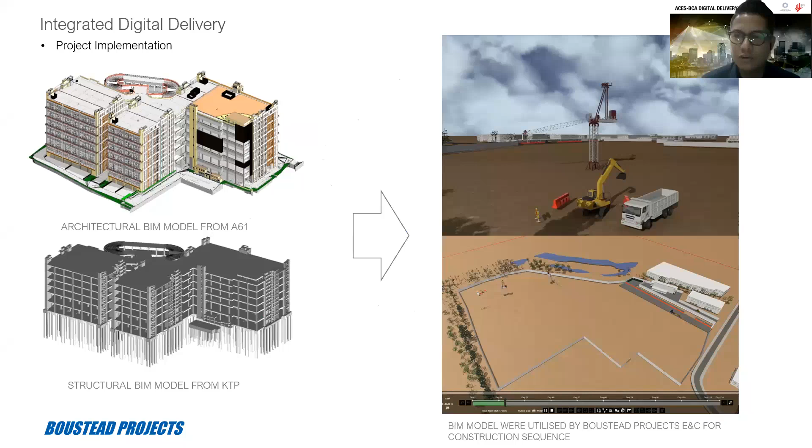As I mentioned, right from the start we inherit our model from the consultants, and we use this to visualize our construction sequence. We enhance the digital model further to allow us to use it for activities like site utilization, adding more details so the level of detail and level of information is enhanced. As you can see in this image, this is actually extracted from the construction model which we inherited from the consultant earlier.

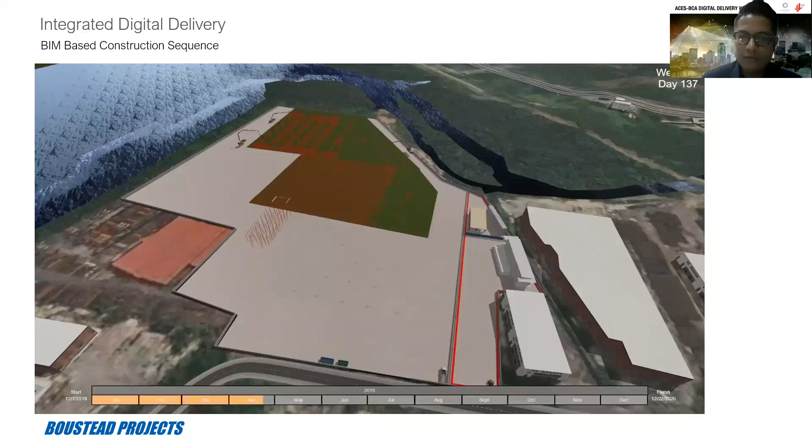I'll play a short video of our construction sequence. This is an example of how we utilize a digital model, or building information model, to create a construction sequence and better visualizing tools. You can see it's integrated with a schedule, and you can see the timeline below, the start date and the end or finish date, all integrated together with the building information model. Let me just speed up a bit.

So compared to the conventional way of showing construction timeline and schedule, this is a very powerful way of visualization. Not only that, we have a very clear understanding of how the items are being installed based on the timeline also.

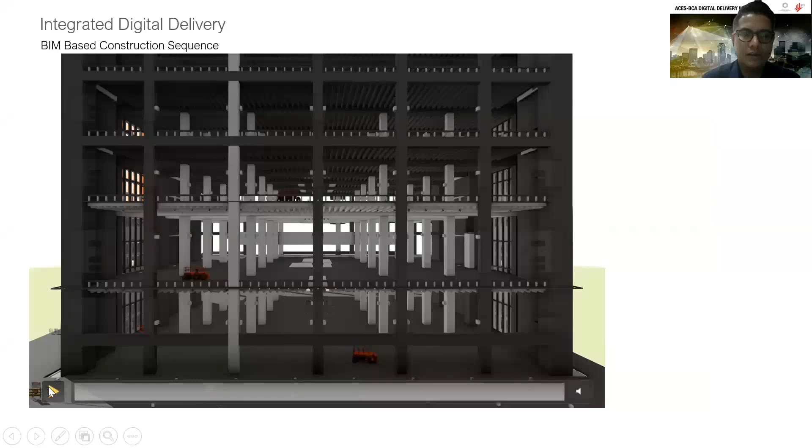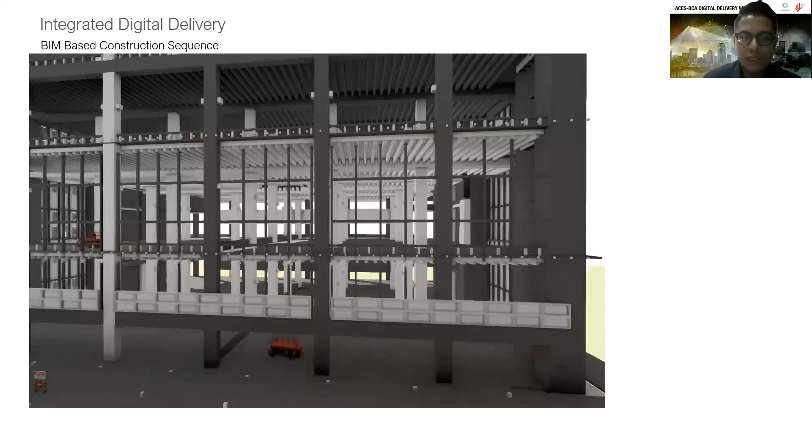Moving on, not only for the whole project timeline, we can also go into detail to show the installation sequence of a particular area. In this case, we show a video of how the sequence of the facade is going to be installed at a particular area, so you can go into detail with this BIM-based construction sequence. I think it's a bit laggy, let me move forward.

We do quantity takeoff from the BIM model. What it means is that information is extracted from the BIM model, and we can do certain activities for quantity takeoff for this project.

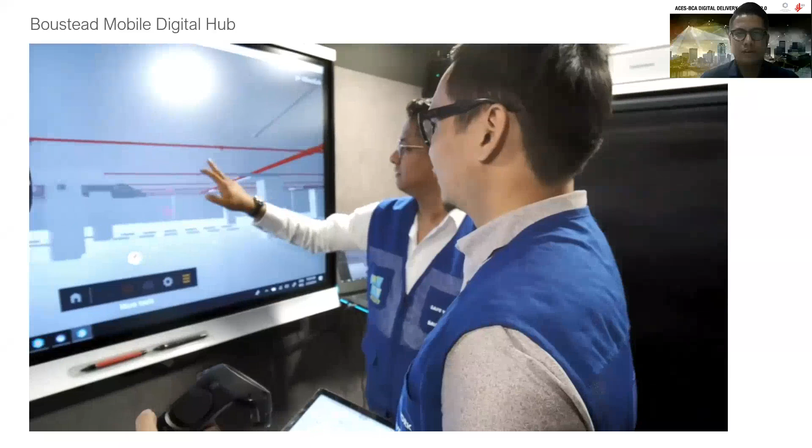I'd like to showcase to you guys also what we have here. This is Boustead's mobile digital hub - a 40-footer container retrofitted with the latest technology, such as high-end laptops that can facilitate VR activities. We also have VR goggles for visualization, and an interactive smart board or interactive screen for us to share and collaborate with different stakeholders, not only within the organization but also externally with our other stakeholders.

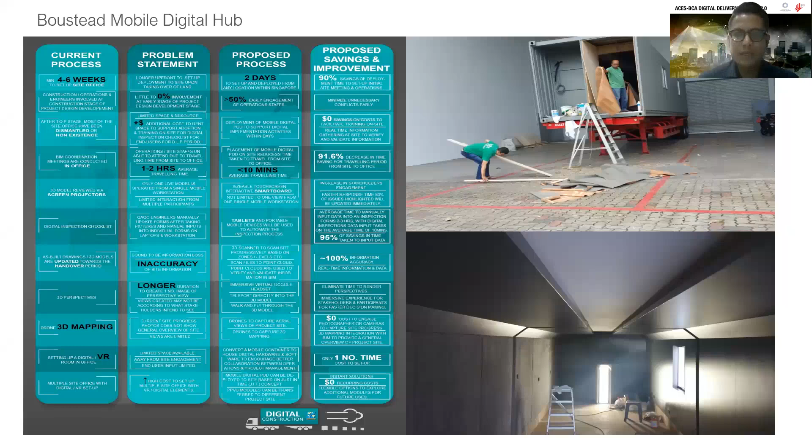So let me touch a little bit on why we do this. This is a mobile digital hub - it sits on a trailer bed, so it can be moved around Singapore. The idea here is mobility, so whenever it can be deployed, it's basically plug and play. It can deploy at any point in time, to any other site or area.

So for Kranji Green MSRF, we have this period called the intensive collaboration period, ICP. The objective of this period - I believe most of us who have experience getting models from the consultant or building information models know there's a lot of question marks about whether this model is according to the design intent and what is being designed for. So to allay all these fears or questions, we have this collaboration period that allows us to answer some of that.

First, the objective - we want to share visualization of different trades and disciplines, validation of the design intent, identify design and coordination issues early, and of course ensure involvement of all stakeholders. In this case, we have the architects, we even have the owners in JTC themselves participating to make sure the models we inherit from the consultant are according to what is being designed for.

So it takes place in a mobile digital hub. It becomes a collaborative space for us, where during the beginning of the project, while the site office has yet to be set up, we have a space for us to actually collaborate in this environment.

And of course, those who have been doing building information modeling have implemented meetings such as BIM coordination meetings, but separately you also have your design meeting, you also have your technical meeting. On this project, what we did was integrate building information model or digital model into the ICE session, and the technical meetings were streamlined, so we don't have a separate BIM coordination meeting and technical meeting.

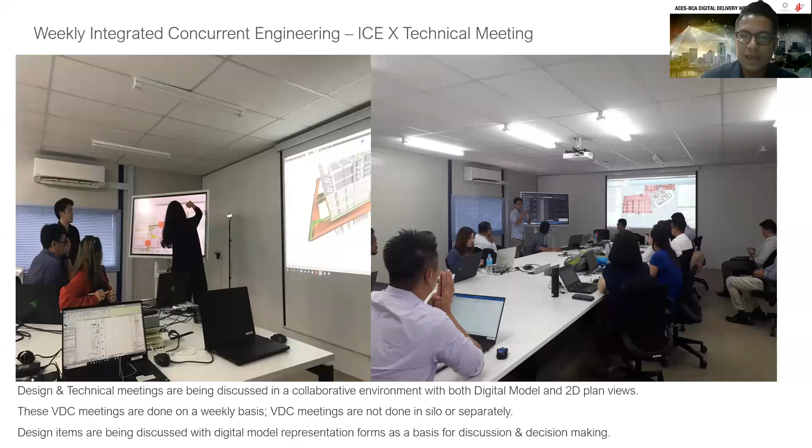Instead, we have one meeting, and we use BIM or digital model as a form of visualization, a form of communication throughout the project stakeholders, which includes the consultants, our engineers, our architects, and also the contractors and subcontractors downstream who are responsible for each trade, to participate and resolve any coordination, design, or technical issue during the meeting itself, with the digital model as the base of all this discussion. So it's not done in a silo or separately, and it allows us to streamline and at the same time become more productive.

And of course, with that session, we collect before and after pictures to show where issues are arising, and then we collect this data. I think at this time and era, data is like they say, the new oil - data is king. So we want to use data rather than emotion for results. Data shows the correct result. So during that session, we also collect the data, identify the items, the number of items that need to be resolved, and give the stipulated timeline and date.

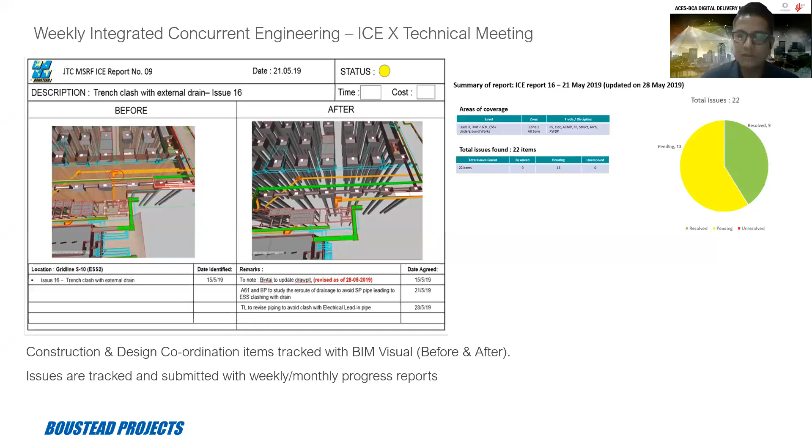And we have a common data environment. Of course, as I mentioned, every file is being hosted on cloud in this project. So we have a common data environment provided by the client in this case, where most of our forms and most of our files are integrated on this common data environment.

Another interesting session - as you know, conventionally what we do when we want to get approval from the consultant, or in this case the architect, in terms of design, is we have to submit a set of drawings for approval. But now to expedite this process, we engage the architect early in the project and get them to use immersive technology such as VR, virtual reality.

In these slides, maybe I'll display - so what we did was engage him and show these are the exact design and materials that will be seen within the digital model and in the actual installation and fabrication of this prefabricated bathroom unit. So almost immediately we can get approval from this session, and then of course we still continue to produce the shop drawings. But having said that, we know that in principle we have the approval, we can start the fabrication of all these elements and installation items.

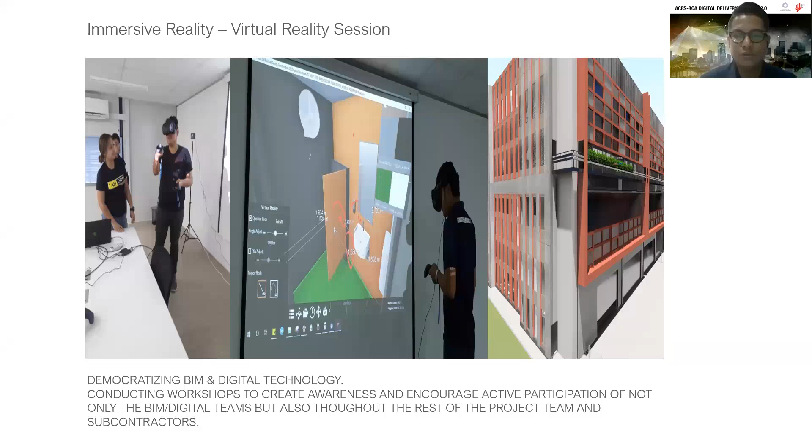This gives them an idea of what they'll see on site later, and at the same time allows them to embrace technology and engage at another level, knowing there are platforms for them to use throughout the project implementation.

We also conduct workshops, empowering them to navigate and review the BIM. The ethos we want to share with project stakeholders is that this digital model does not just belong to the BIM team or the digital guys who create it, but belongs to the whole project team, and all stakeholders have a responsibility.

We need to give this knowledge and empower them to navigate and review the BIM model. By doing so, we allow them full confidence that the accuracy and integrity of the BIM model is there for them to use in their work.

The point I want to put across here is mobility. During this period of the COVID-19 pandemic, if we still relied on hard copy paper drawings, we may face a lot of disruption in the workflow. Now with smartphones and QR codes, we can access all this information easily at the press of a button.

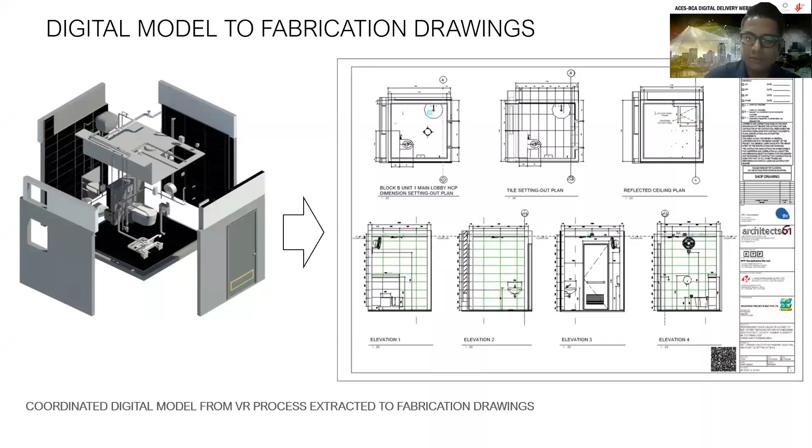Visualization: these are some images showing how we use the digital or building information model to show the exact material and get approval for design.

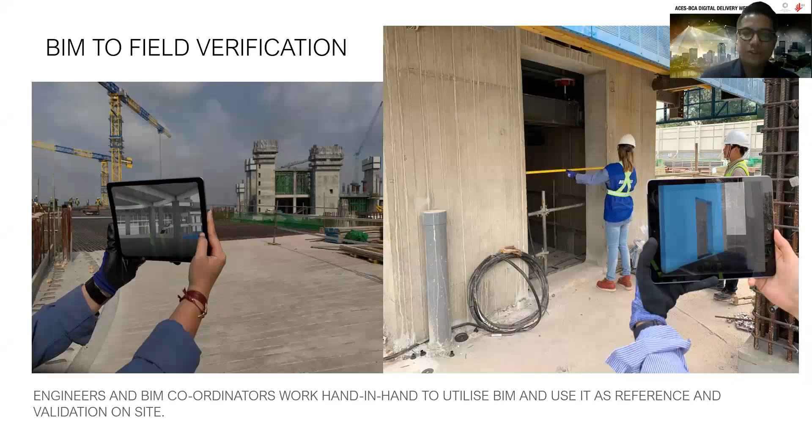We also have what we call BIM-to-field verification using tablets and iPads on site, where the BIM coordinators, engineers, and site coordinators work hand in hand, making sure all installations and measurements match what is coordinated and designed in the building information model. They use it as a reference and validate it on site.

We also use drones—Boustead Eye in the Sky, as we call it. Most people think of drones just for collecting images or aerial views, but we want to go a step further, not only collecting point clouds and data.

We are also in the pipeline to integrate drone inspection with BCA CONQUAS using artificial intelligence, identifying non-compliance according to BCA CONQUAS during inspection. This means hard-to-reach areas or areas with a lot of safety risk can be inspected using the drone—we're relying on technology to do inspection moving ahead.

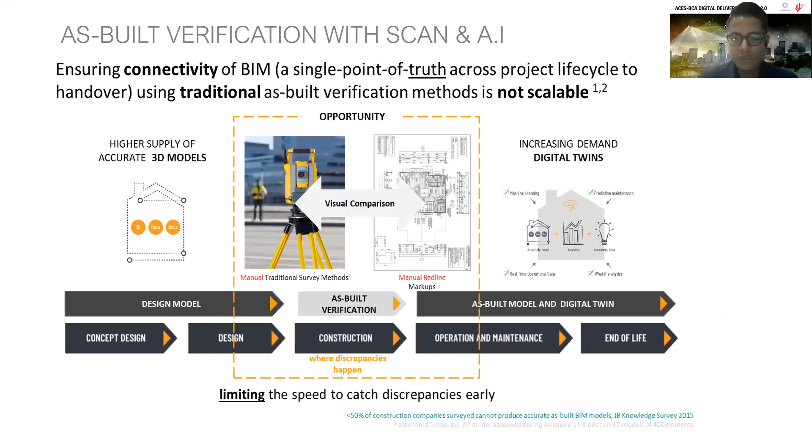The pain point is that most of the time, manually looking for discrepancy and inaccuracy requires visually running through the model with the point cloud files. But now, with the AI platform we have on board, we can automate that whole process.

First, we collect point cloud files using drone scans and 3D LiDAR scans. Second, we combine these files—the digital model or building information model and the 3D design model—with the point cloud files onto a platform using AI to verify, and almost immediately all these issues can be identified automatically.

This means you have an in-between process where you progressively update the model according to what is actually being built on site.

Here's an image of point cloud files collected during construction. In layman's terms, previously this would be done conventionally by overlaying 2D plans with images, but now it's done using point cloud files.

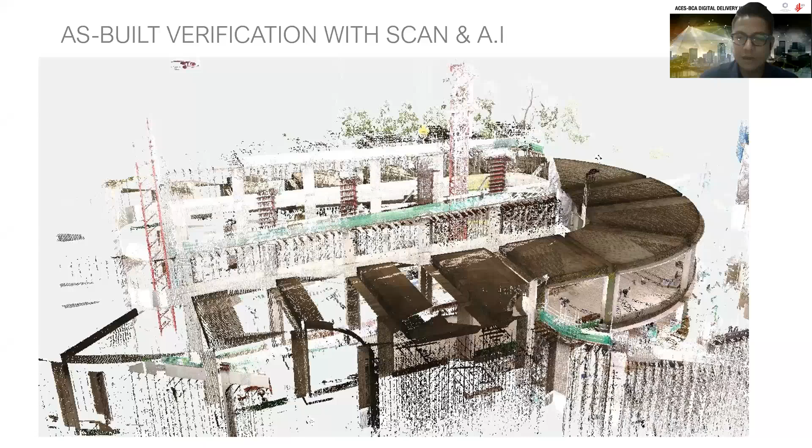So if there's any discrepancy between what is built and the digital model, you shift the building information model or digital model accordingly to what is collected using the 3D scan and the drone capture.

A quick video again showing how the guys are using the scanning on site—let me just speed this up a bit.

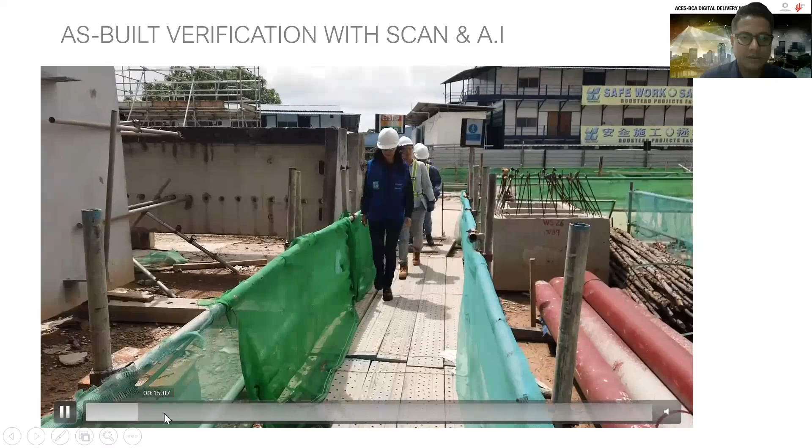So if you can see, these guys are actually the BIM managers, the BIM leads, and the BIM coordinators, moving ahead as part of upskilling our guys. The BIM guys are not just making sure the BIM models are modeled accurately, they're also involved in validating this model on site. They're empowered to use new equipment such as laser scanning, and it's not rocket science to use some of these technologies. It helps them understand better how the site works, and at the same time integrate with the BIM model. So these are the guys involved in this project.

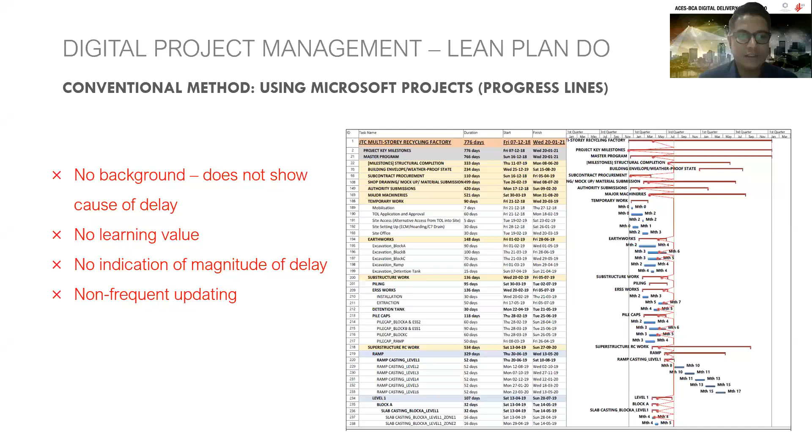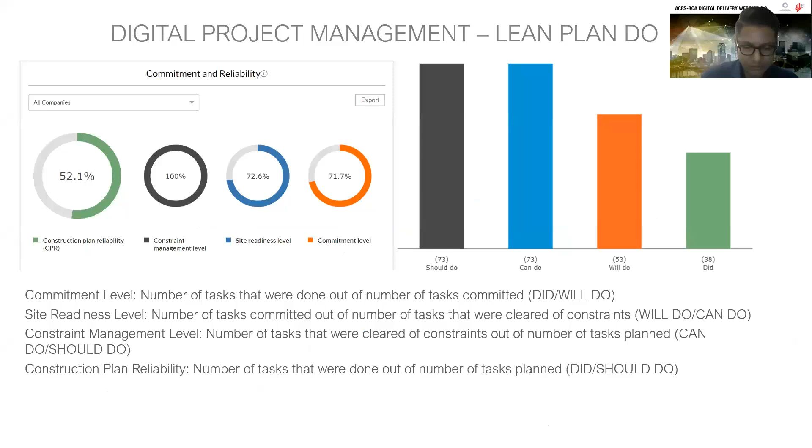As I mentioned, we use Lean methodology, specifically Lean Plan Do. It's a platform - again, I'm not here to sell software, but this is a digital solution that allows us to understand the project better in terms of transparency and where the bottlenecks are. Conventionally, a plain Gantt chart doesn't show any cause of delay, so there's no learning value. But with Lean Plan Do, we can see where the delays are, the actual implementation versus the plan implementation, what we can do, what we should do, and why we did not do it.

Talking about project transparency, we can identify and engage the bottleneck - not to blame, but to understand the reason for delay. With that, we can manage or anticipate them and progress towards completing the project. So a digital platform like this allows us to have a very transparent project overview, and this is how the interface looks like.

It is quite friendly and user-friendly in terms of the interface, easy to use. Of course, we initially had a lot of challenges in implementation, but having a workshop like this helps minimize the gaps and makes people understand why we implement things as such. Because the important thing about managing or implementing this solution is you need a collaborative spirit first - you need to make sure the key stakeholders are involved, and data is input correctly so you can collect it properly.

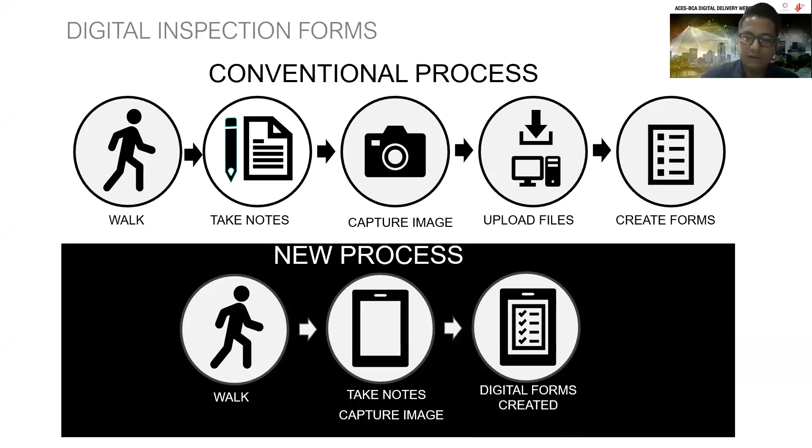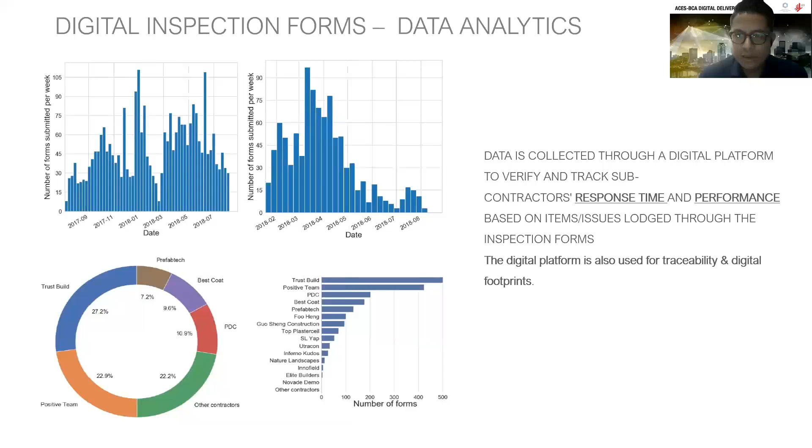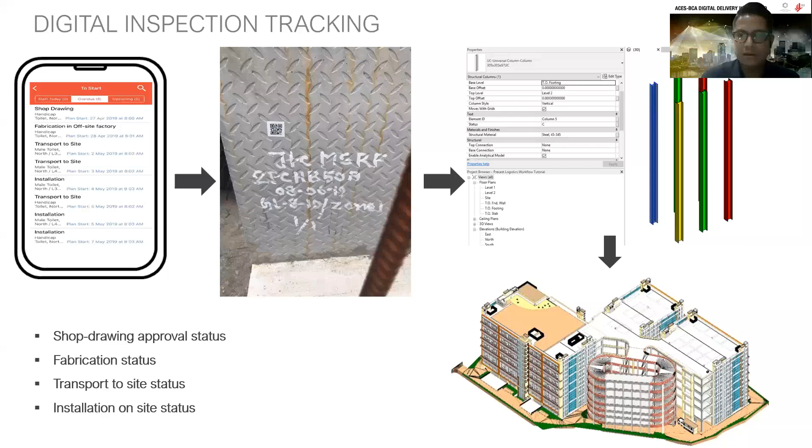We have digital inspection tracking. What this means is we want to track 4 statuses: the shop drawing approval status of our fabrication or precast element, fabrication status, transport to site status, and installation on site status. So these 4 steps, we integrate all into our digital model.

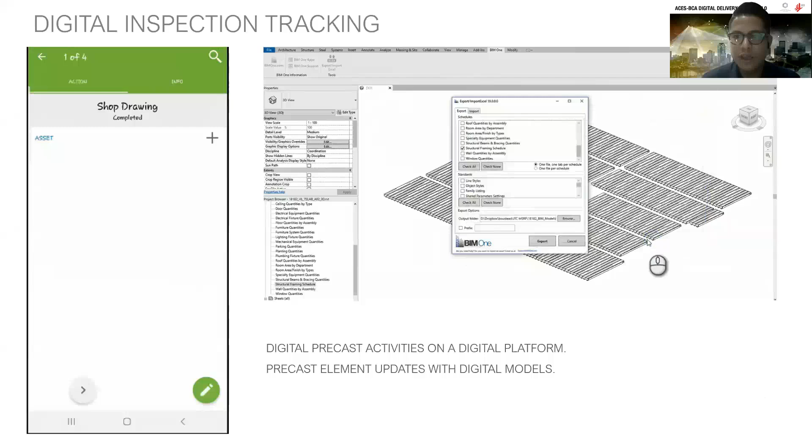I'll show you a quick video of how we do this. QR code is the base of this technology - we push this data into a platform, and then this data can be pushed back into the building information model to show the status of each precast element, whether it's been installed, yet to be approved, yet to be on site, or already on site. You can see the color changes in this video. Let me just fast forward a bit.

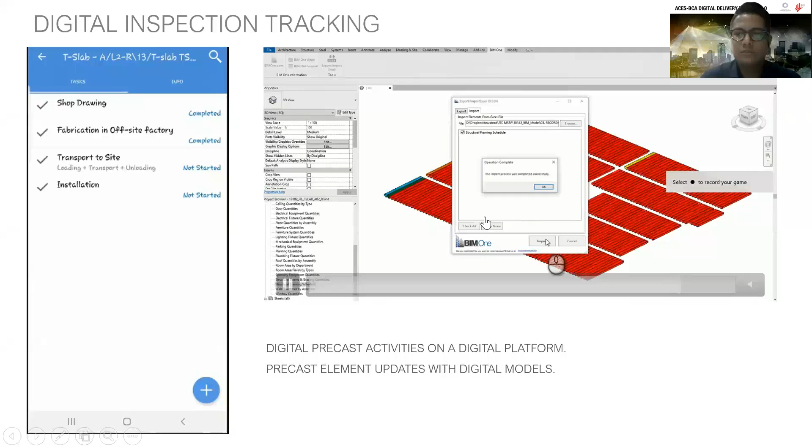Yeah, so as you can see, once we push the data, all the statuses of the precast elements can be shown in different colors based on the status.

So what's next for us? I mentioned our digital transformation journey has 3 holy trinity, if I may say: the people, the process, and the technology. In fact, as part of the process or the technology, data forms the base of all this implementation. And without building information model, we cannot execute what you have just seen earlier. And with all this data, what we are trying to do is integrate them and ensure there's a seamless integration between all platforms and solutions.

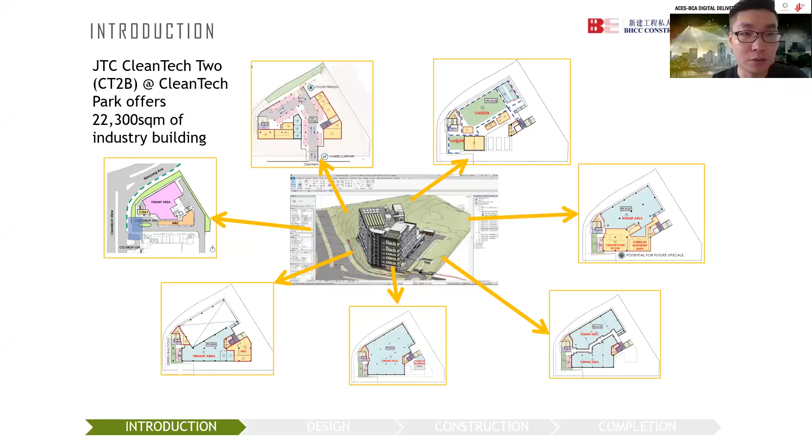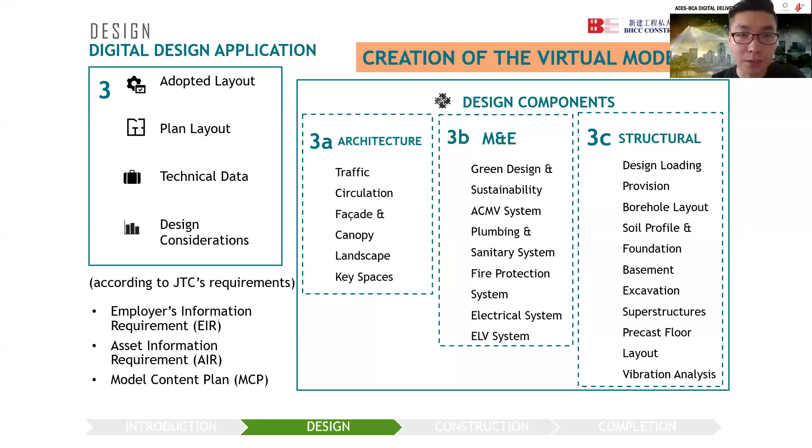Okay, for the design, this project has adopted a 4-stage digitalized approach through IDD towards design, construction, fabrication, and as-built. At the design stage, we apply digital platform for all ARCHI, MEP, and C&S. We also use real-time model coordination software with a cloud-based server, so everyone can access the cloud and study the models.

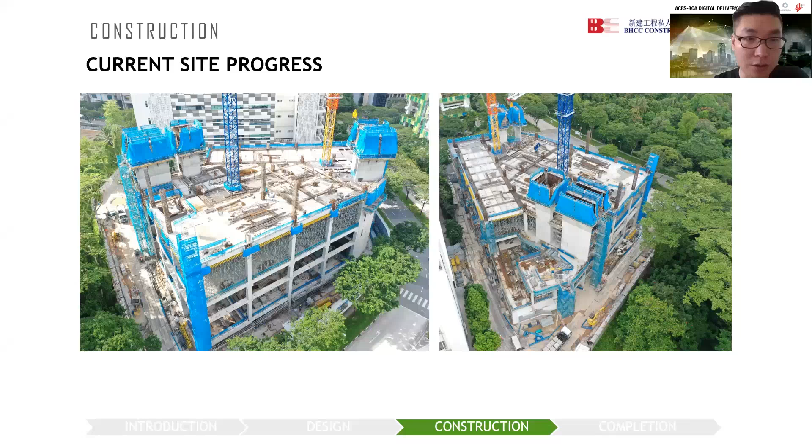Okay, for construction, this is our current site progress. You can see here so far we've finished the 4th story already, so we are going to do the roof.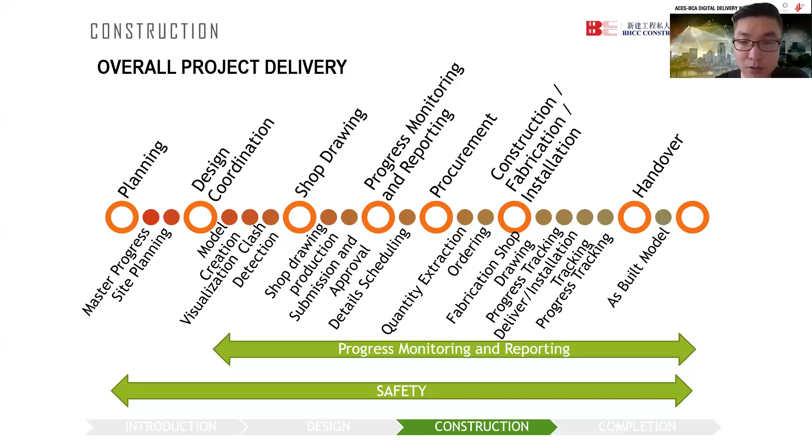The controls - based on the actual work and the spec requirements, we generated this overall project delivery roadmap. For this project, it starts from planning, design coordination, and shop drawing, progress monitoring, procurement, construction, and then ends with handover and as-built model submission. All the details you can look through here, and it's quite easy. Because of time limits, I won't explain one by one.

Okay, before I go through the IDD details, let me quickly go through the construction work challenges for this project. The first one is site access constraint. The following is tight work spacing, as this project is very close to the CT2A building. And then the next is wildlife movement around the CleanTech park - you can see a lot of wildlife around the site.

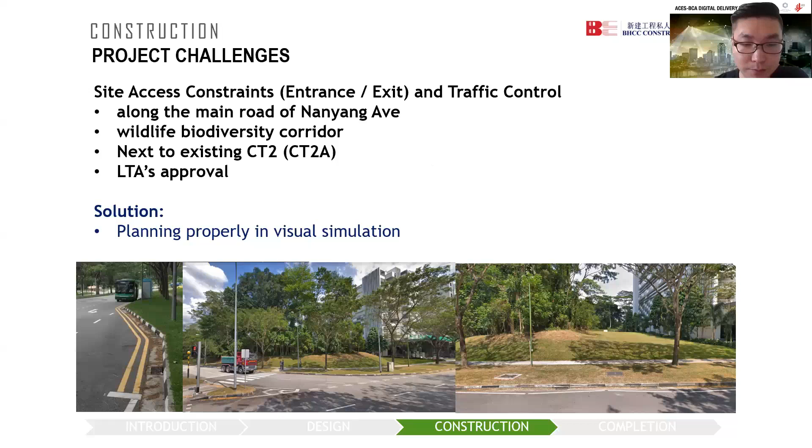So our IDD implementation was based on the project requirements and challenges. Because of the site access constraint, traffic control is very difficult. So the first challenge is overall site deliveries. So good planning is very important and necessary for our project.

Referring to the drawings and also collecting the design models, we finished our construction model and then master program. With further development, we issued to site our site utilization plan, sequence simulation, and safety education for the site project team for discussion, to try to limit the discrepancy for the works.

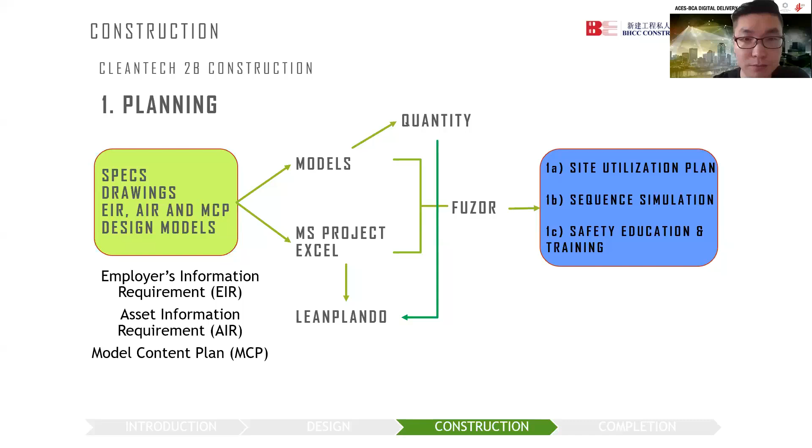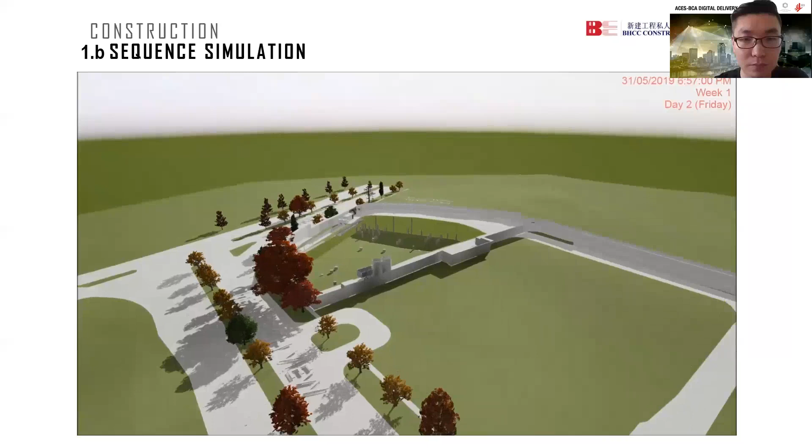This construction sequence is based on the planning schedule and then the actual work schedule. So far, the planning work is based on the actual date.

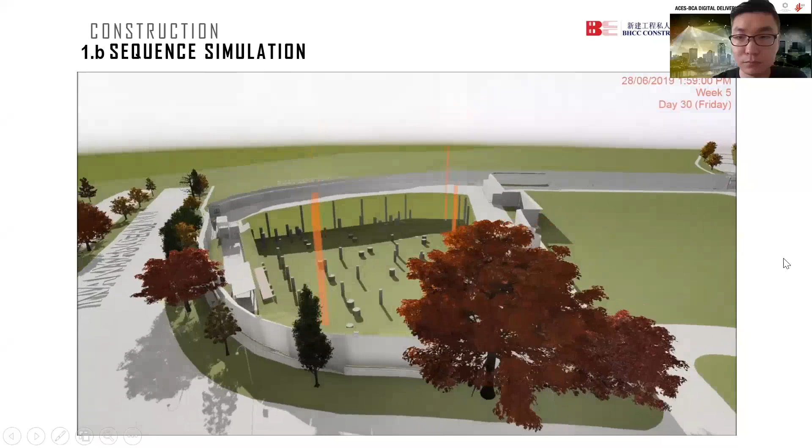Sorry, it's difficult to control the video. Okay, so I dropped this sequence simulation.

For the safety simulation, we based this on the site's actual condition and the safety guidance. So we created some simulation videos to play during the safety induction course for the workers. Here are some simple videos. This one is for the work at height. We created a simulation to show the workers the work sequence and what requirements they need to follow.

This one is for the slab opening. Okay, this opening doesn't have a barricade, so it's an accident risk. We need the barricade and the signage. So these videos can be shown to the workers so they pay more attention than with conventional methods. Also, it's quite clear for them.

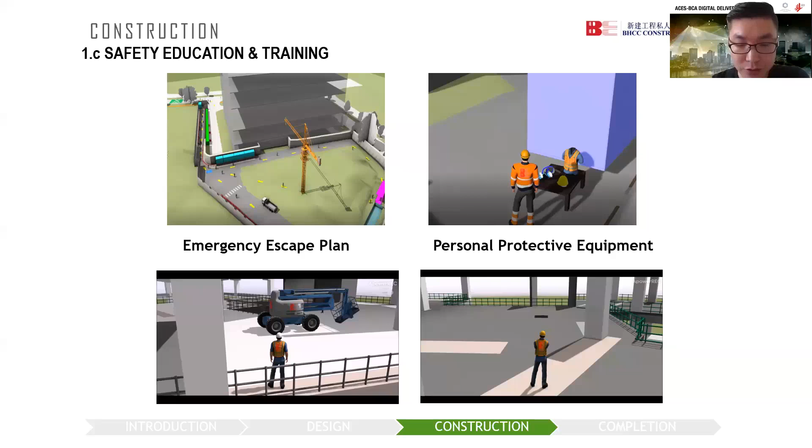Okay, the next challenge is that our working site is very tight and close to the CT2A building. So our solution is just-in-time logistic arrangement for the delivery, proper coordination sequencing, and close monitoring of the delivery schedule with all subcons and suppliers.

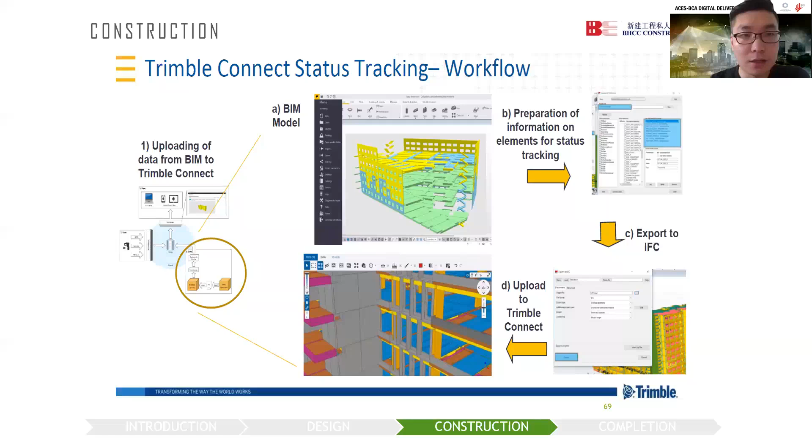So this is our platform used for the just-in-time logistic arrangement. We finish our construction model, then prepare the information on the elements for status tracking, export the IFC model, and upload it to the platform. So this is the workflow.

The QR code is used for this project. All concrete precast element status will be tracked from the fabrication yard to the construction site. During this duration, the QR code is very important and needs to be scanned by the relevant person.

After the scan is finished, the real-time information report will automatically update on the dashboard, so everyone can access it and check the latest information.

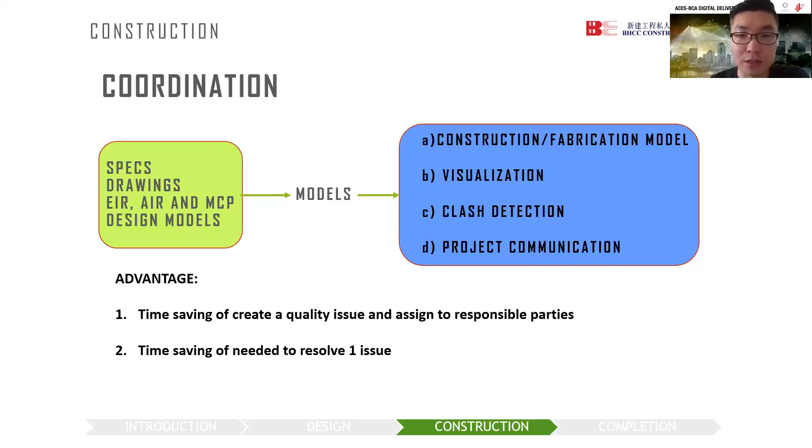This is a simple workflow for the coordination, also referring to the tender drawing, spec, and design model. We finish our coordination model and fabrication model, and use this with our visualization, clash detection, and project communications.

Using VR, all the latest models are combined and reviewed during the technical meeting and coordination meeting to find out discrepancies easily and faster. After the meeting, comments are automatically generated and sent to the relevant parties, and feedback is received from them.

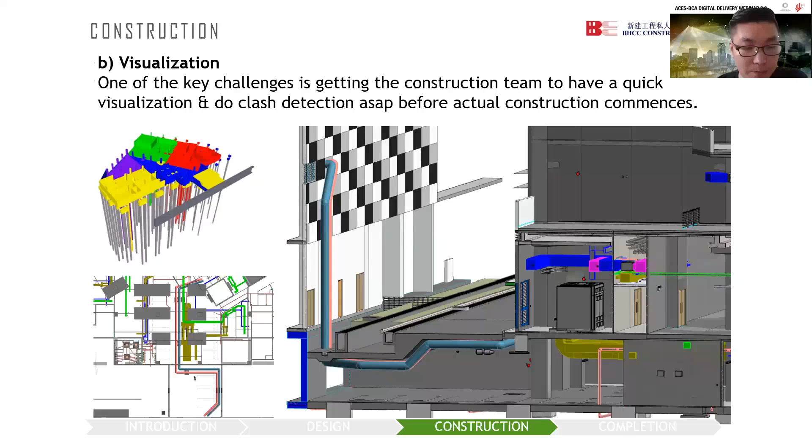For some critical paths, one of the key challenges is guiding the construction team to have quick visualizations. So using this helps the engineer resolve clash detection before the actual construction works.

Okay, this is a short video for the visualization. So let's walk through. This is an overall view of our site building.

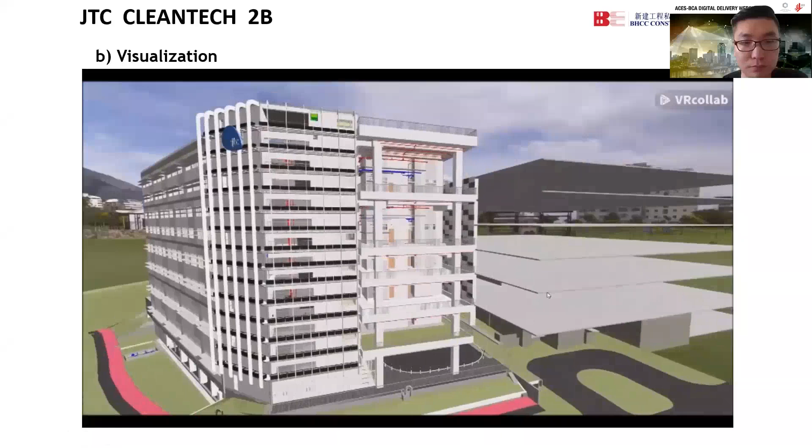Okay, here is a drop-off area. Here is an entrance lobby. Okay, this is a lift lobby.

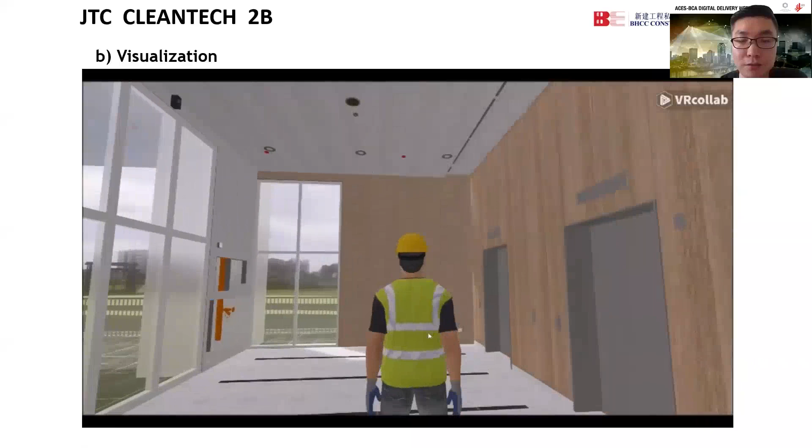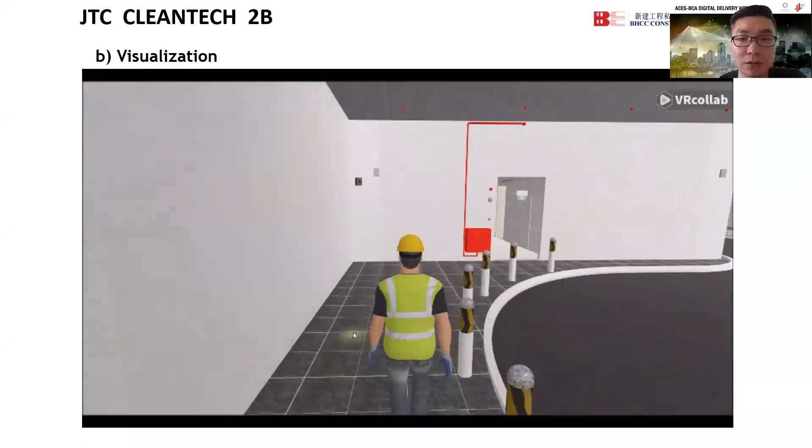All the finishes were selected by the consultant, and then we created the model here, so we could show it to the consultant and client so they could decide to use it. So we can confirm the finishes materials and the package quickly and faster.

So this is a toilet, first story. Okay, I will stop the video.

Okay, for the clash detection, this is also a short video showing how we do the visual checking using the VR. We created different colors for different trades, so you can see very clearly between the different services. So here is a trunking clashing with a pipe.

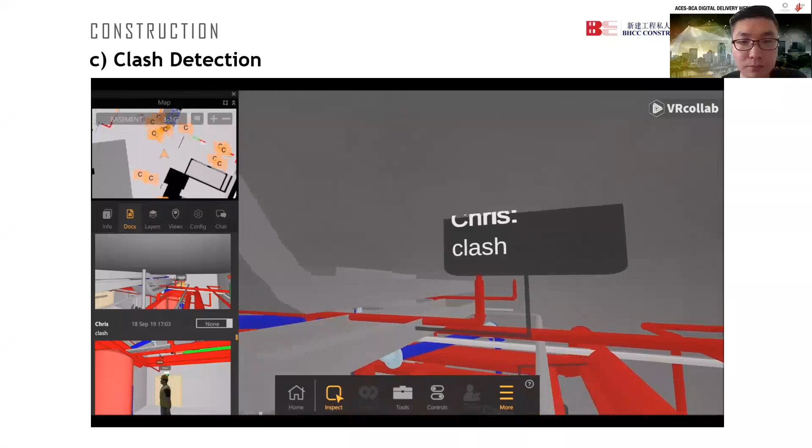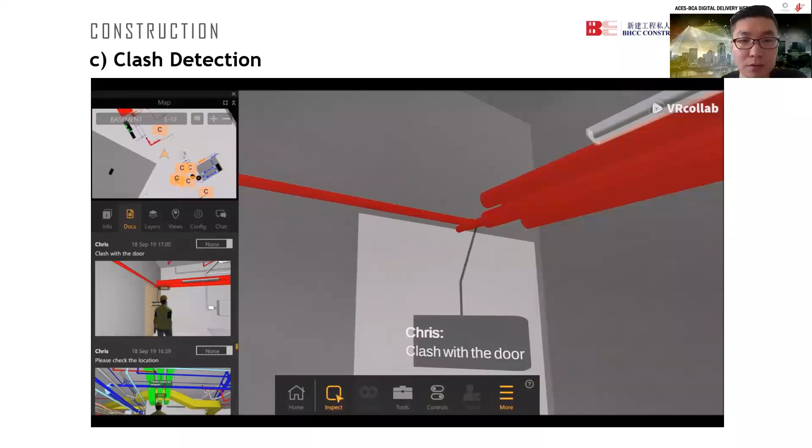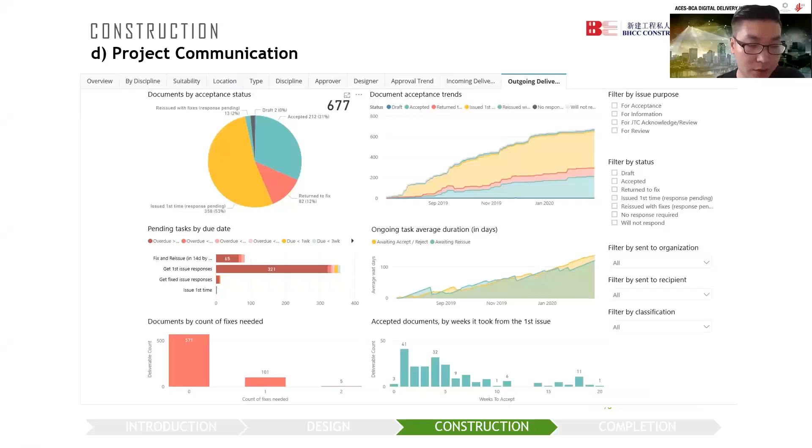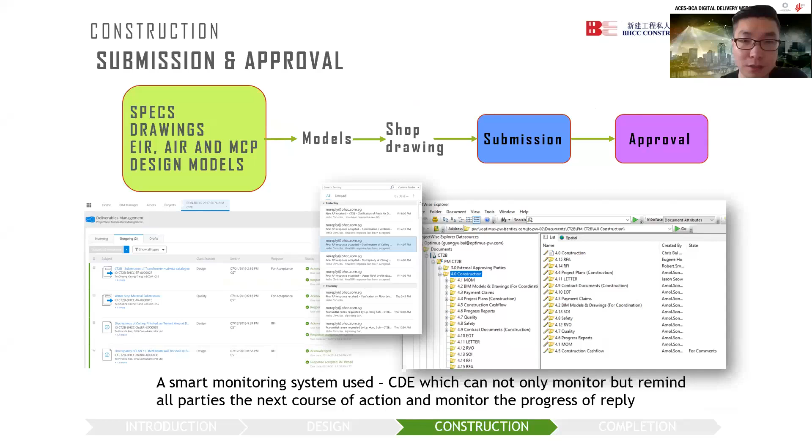For our submission and approval, we also go through the CDE, referring to the workflow or smart monitoring system used. This not only monitors but reminds all parties of the next course of action. So through the CDE, everybody can know the status and the next step they need to do.

Site physical work progress monitoring and reporting - this workflow shows how we've done this part using digitalization.

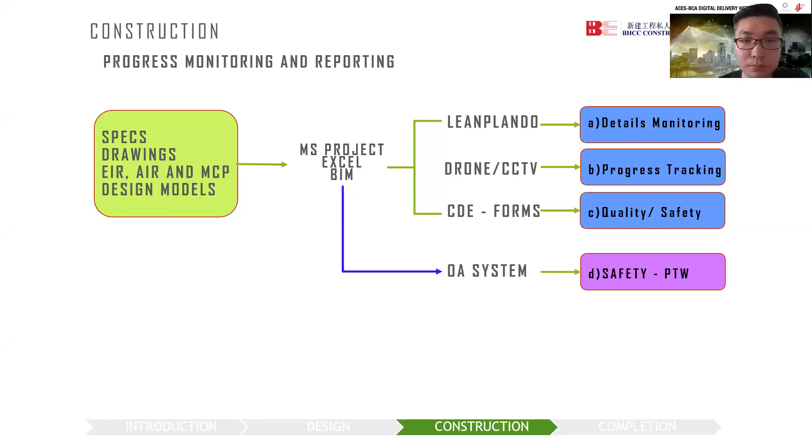The first one is detail monitoring, through this software or platform. Everyone can access this schedule and update daily work, actual work done for each day, and then plan the schedule for the next week. This allows easy monitoring and look-ahead scheduling.

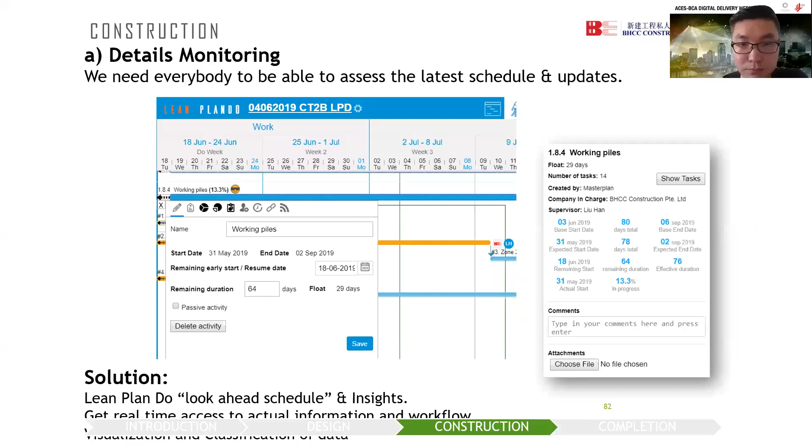Tracking site progress, we're using drones and CCTV. Some areas the CCTV cannot cover, so we use drones to cover those areas, and the drone footage also very clearly shows the overall site progress.

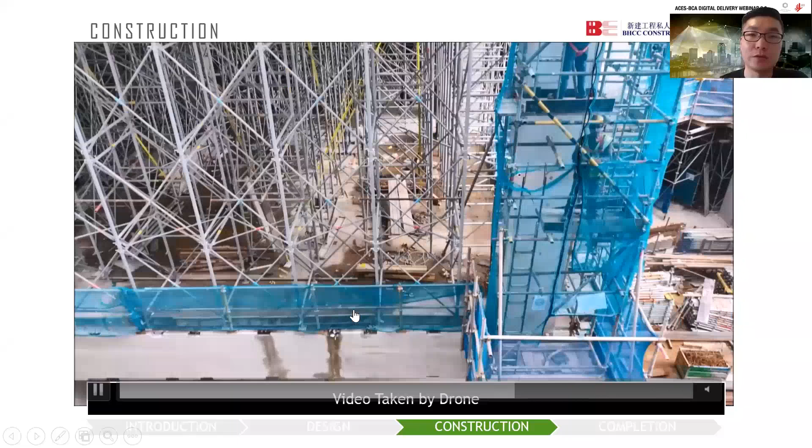This is a short video taken from the drone. Because the drone camera is high quality, you can see very clearly which area is doing which works, and whether the workers follow the safety guidelines for construction works. It's also very quick to see the overall site sequence.

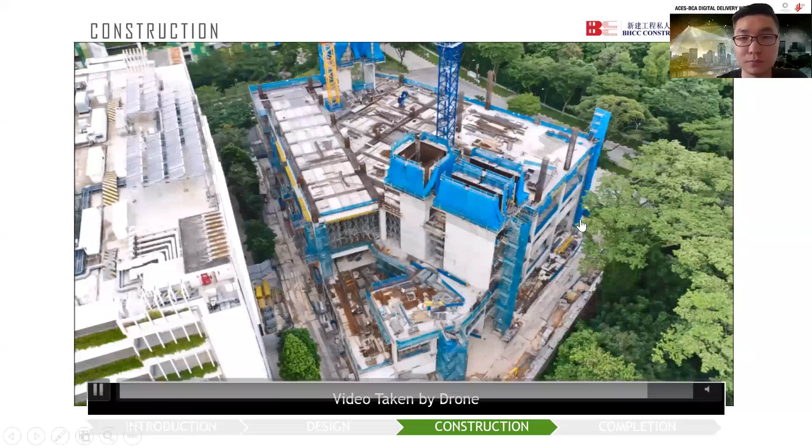This is the overall site sequence.

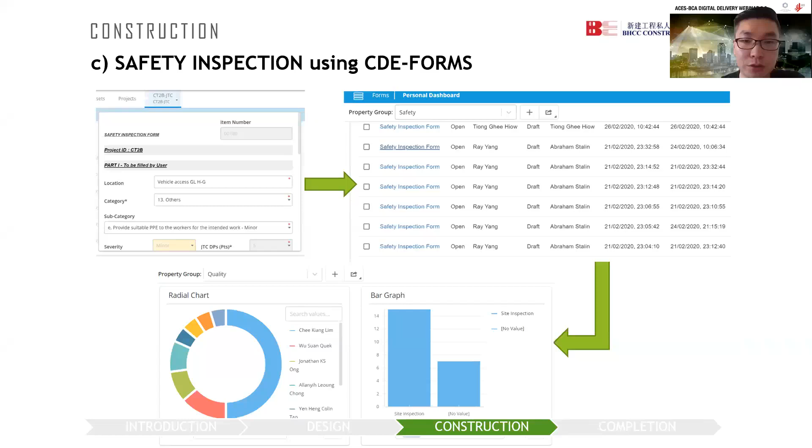For safety inspection, we're using CDE forms. All the forms are used here, and we assign people to be in charge of the forms. Once we get notification from the client and consultant, that portion needs to be fixed and then closed. This is the workflow for the forms - only three steps.

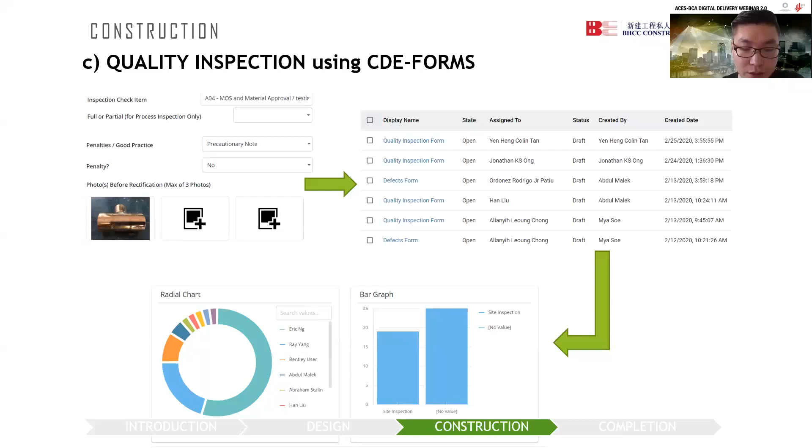Quality inspection forms also go through the CDE. The workflow is similar to the safety forms. This makes it easy to check and record all events happening on the site.

For the permit to work, we're using the OA system. This system is fully developed by our company, and we're also using this system for most of our company's projects.

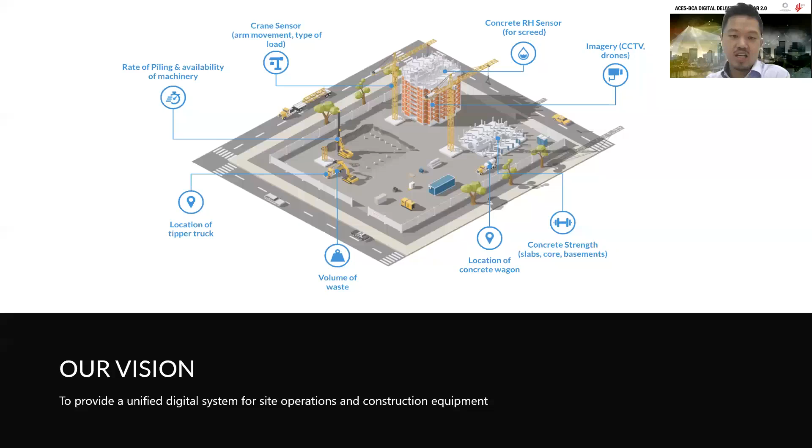We provide digital construction technology to the industry to accelerate the digitalization of project delivery, which matches the IDD theme of Singapore. We have a vision to have a unified digital system for all site operations and construction equipment. To do this, we use a lot of sensors to capture data on site, and eventually we can control the equipment on site. So this is our vision.

As you all know, safety is a huge concern for the whole construction industry around the world. By using more digital technologies, we hope to automate many of our operations and data capturing and recording processes, so as to reduce the number of workers and man hours on site, reduce the risk, and improve the efficiency of our work. That's why we work on digital technologies.

As many of you are project managers, definitely you will love sensors because they will tell you information that cannot easily be taken from the physical world.

But how do we start our digital journey? We don't digitalize randomly. Normally we start with the most commonly found things on site. So today I would like to share with you some sensors and digital technology used in four areas: concrete, site condition, energy, and also a digital platform.

The first technology I would like to share is about this concrete strength sensor. Traditionally, after you pour the concrete for a construction building, you need to take concrete cubes so you can crush the cube and tell the concrete strength before proceeding to the next step. This sensor basically automates the crushing of cubes and tells you the concrete strength in real time.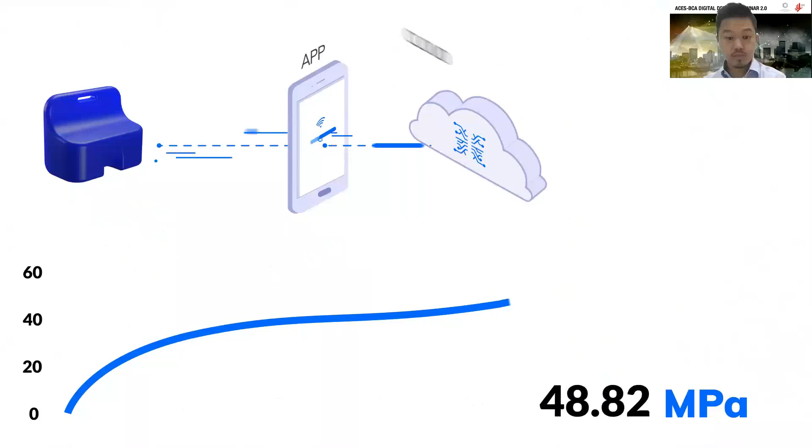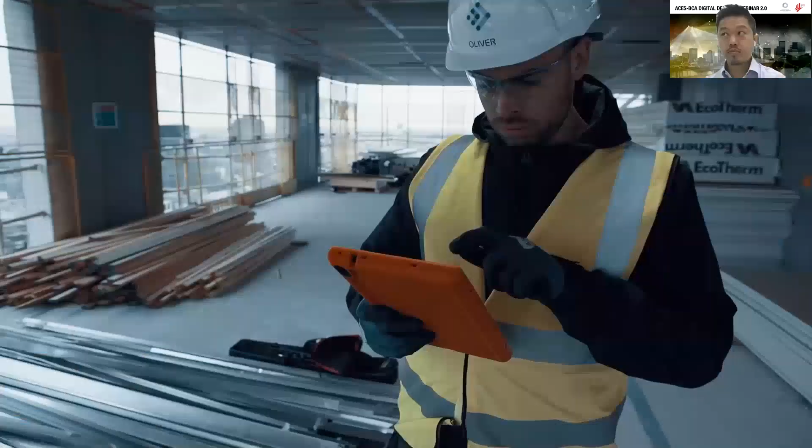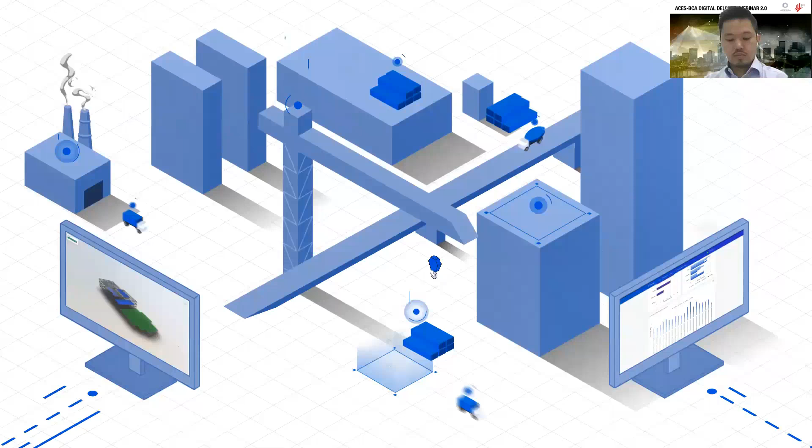We created Concrete DNA, your platform for analysis, prediction, and collaboration on your concrete pours. It's powered by this guy, Converge Signal. It's small and powerful. It sends real-time concrete strength data to Concrete DNA. It means you're going to optimize costs, strike faster, guarantee safety, and avoid delays, all while reducing your carbon footprint. It's good to be the good guy. And because Concrete DNA is in the cloud, teamwork has never been easier. Anyone can access the data from anywhere at any time. But how simple is it to set up? That simple. And it's not just easy, it works. Concrete DNA has already helped build structures up to 30% faster, which is why some of the leading contractors around the world have been working with us and reaping the benefits. But concrete is just the foundation. Let's think bigger. We're building a network of sensors that form Construction DNA, the future of the job site, tracking prefabricated assets, scheduling crane lifts, monitoring structural and environmental factors, all to optimize efficiency and sustainability. Construction DNA links data from sensors with BIM models, construction programs, and cost data to create a real-time digital twin of the job site. Join us to build the future, a world of interconnected sensors and an intelligent data platform where they all converge.

As you see from the video, the concrete sensor is just one of the sensor technologies this company is doing. We have done some trials for the concrete sensors in Singapore.

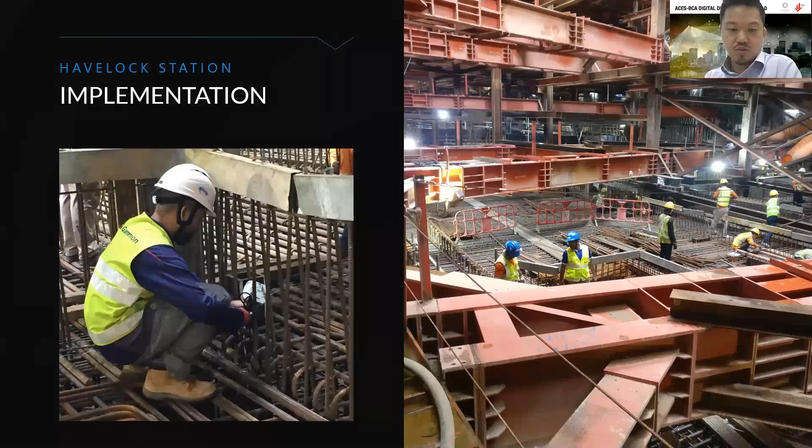I'll share a few experiences from two projects, including the Havelock Station MRT project. You can see the installation of the sensors. Basically, before the concreting works, you tie the sensors to the rebars, and that's it. No special skills are required, and the sensors and infrastructure are designed to be robust enough to work well in this environment.

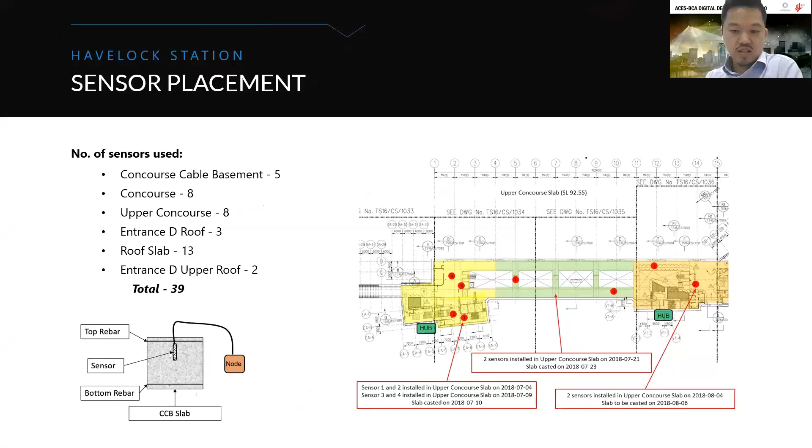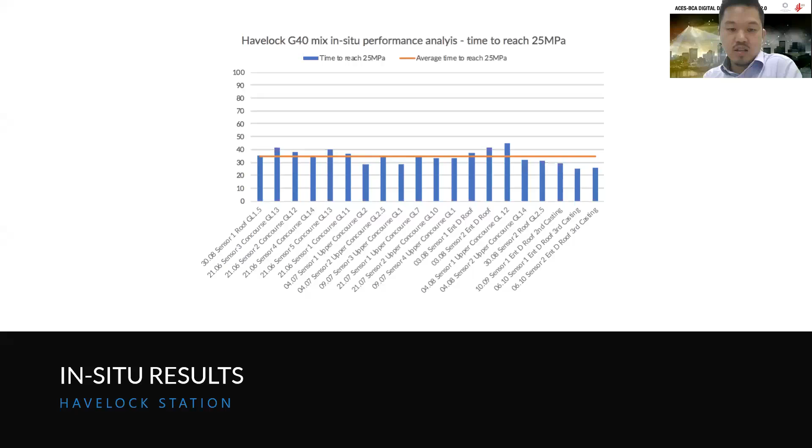The result shows that the concrete reached 25 MPa in just over 30 hours on average. We also compared the cube results, which were more or less similar. We found that to reach the concrete's full strength of 40 MPa, it takes less than 4 days, compared to the contract requirement of crushing cubes at 7 days. So there are actually 3 days saved, improving productivity in terms of proceeding to the next step once the concrete reaches strength.

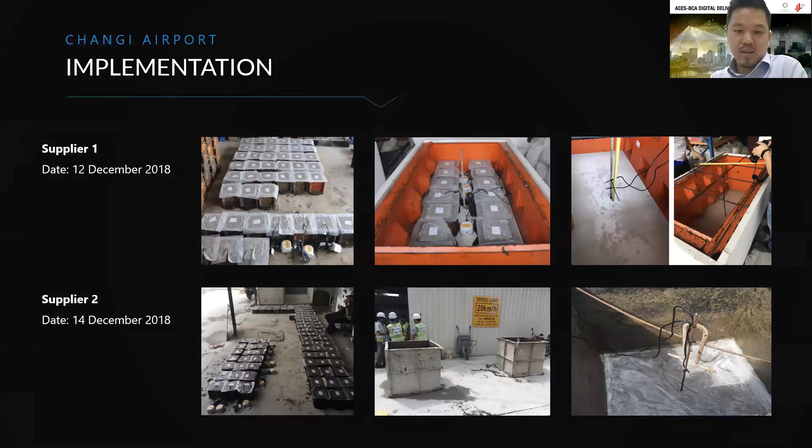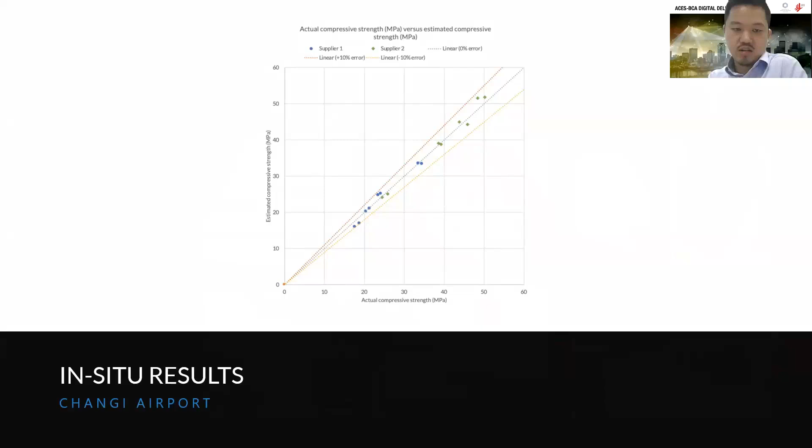Apart from the concrete strength sensors, I'd like to talk about another type of sensor: wireless site monitoring sensors. For excavation works, tunneling works, and general construction works, you usually have to send people outside to take records about tilt, vibration, groundwater level, settlement, cracks, and so on, which currently is done by humans. These sensors automate this process to capture site data real time and automatically, so you can just see your data while sitting in the office or at home.

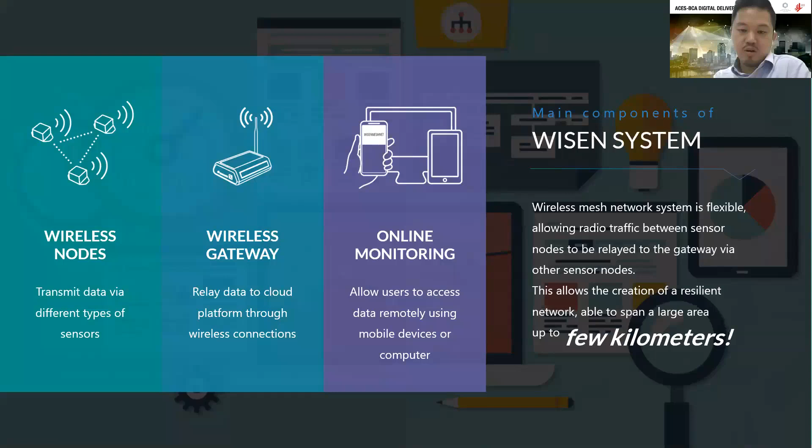To set up these sensors on site, it comprises the sensor itself, a gateway box, and an online monitoring platform we call Geomon. You just log in and use your iPad to see the data. It's applicable to any type of construction project and works fine in any kind of harsh construction environment. The battery lasts 2 to 3 years because of breakthroughs in lithium-ion battery technology.

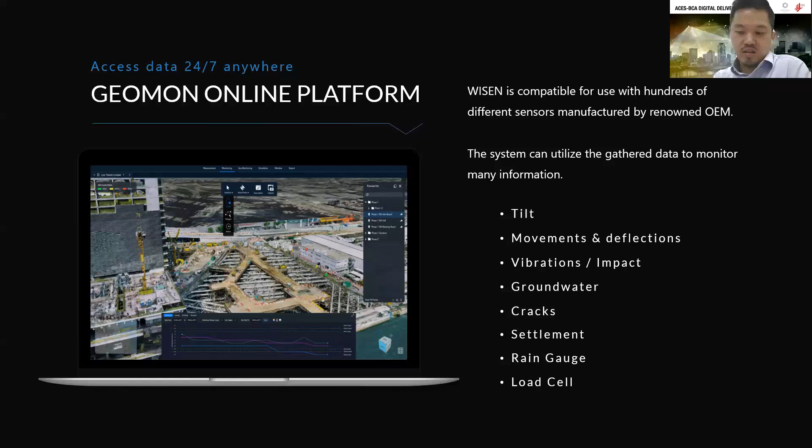So now, from this platform, you can see this kind of data - tilt, movements, vibration, groundwater, cracks, whatever - automatically pushed to the platform in real time. You don't need to send people outside to record this data anymore.

There's a case study from Hong Kong. In this excavation project, a 20-meter deep excavation, we installed more than 100 sensors on the ELS steel struts that support the deep excavation. The project managers on site can see, from the lower right-hand corner of their phone, the strut loading in real time. If there's a likelihood of any collapse of the excavation, the project managers can see it in real time. Or if no significant events happen, you can still tell which steel struts are overloaded or underutilized, so you can consider earlier removal of those struts to improve efficiency and site operation.

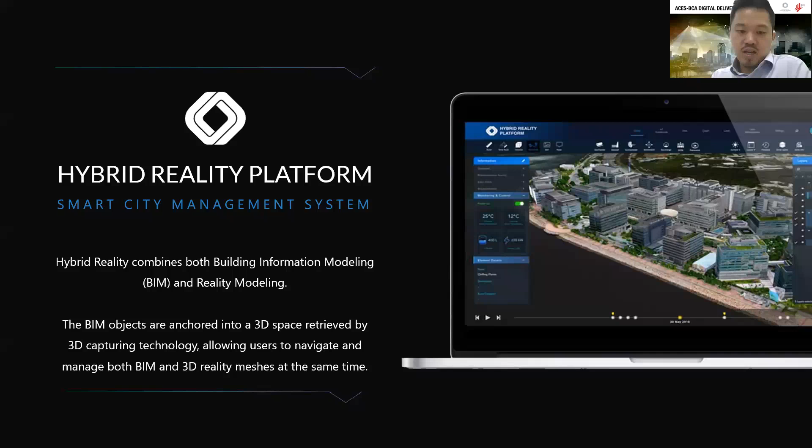The third technology I'd like to share is this hybrid reality platform. It's a website, a digital platform that stores 2 types of 3D information: drone photogrammetry 3D models, and building information models. Everyone can access it without needing special software on their computer - you just log in and see the drone and BIM models on your iPad, phone, or laptop, anywhere.

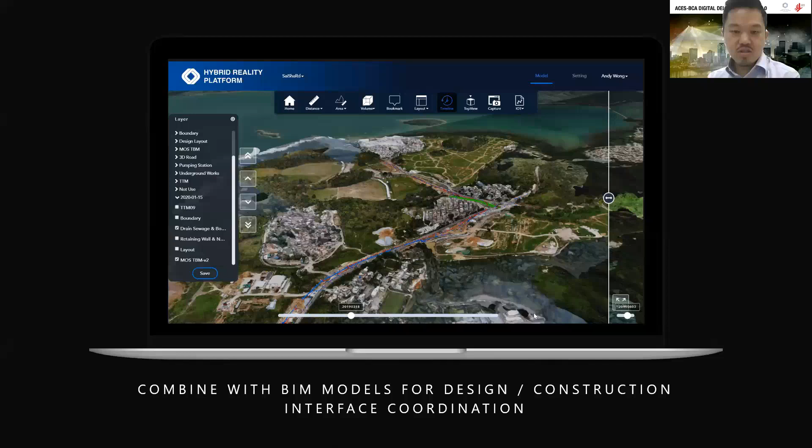Drone technology has already been discussed by previous speakers, but how to see the drone data is the invention and advancement of this hybrid reality platform. It makes the data very easily and readily available to all users without needing any special software. From this, you can compare your site progress in 3D views taken by drone on different dates, so you can manage your site progress more effectively. You can also do line measurements, area and volume measurements on this platform, and cut sections from the 3D views.

You can also combine your IoT sensor data and show it on this same platform. So imagine you have installed the previous sensors I mentioned - from this platform, you can just log in and see the site movements and the concrete strength data, also in real time, from this digital platform.

The fourth technology and the last one I want to mention is not really sensors or digital, but an energy and environmental technology. This is a lithium-ion battery-based energy storage system contained in a container-sized compartment, so as to replace diesel generators on site. This is a breakthrough technology.

It's an invention. Basically, with this, you can power heavy equipment, even like a tower crane, on your site, so you don't need a diesel generator. As you can imagine, it does not have black smoke, it does not need to refuel, and the uptime is close to 100% because there is no downtime. You don't need to do any maintenance or refueling works.

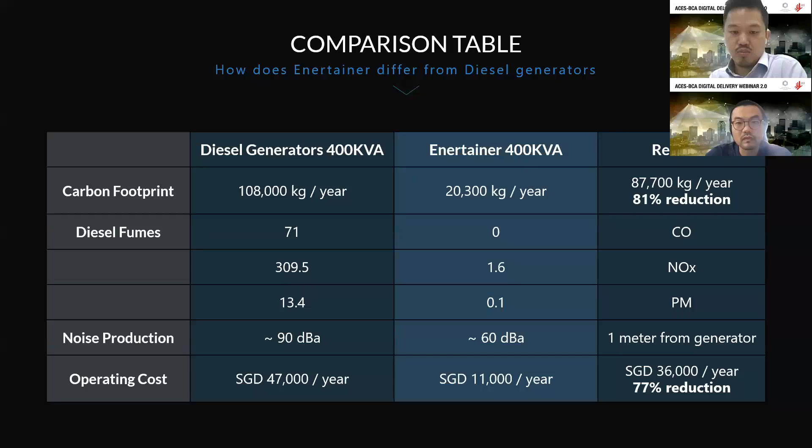So I've finished my sharing of these new technologies today. I hope you enjoyed it. Thank you.